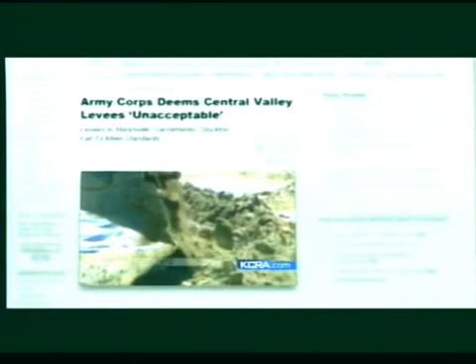An extensive inspection of California's levees is raising questions about the standard of maintenance of levees across our area. There's a concern of under-seepage through sandy materials under the levee. Sacramento is the most at-risk metropolitan area for flooding.

Yeah, it is going, and look at the water just raging, and that is heading towards homes.

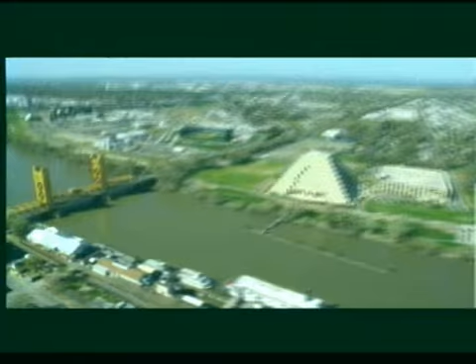Across the nation, man-made mounds of dirt or concrete, commonly called levees, surround waterways, farmland, and cities, helping control the flow of water and reduce the risk of flooding for millions of people. In California's Central Valley, there are as many as 6,500 miles of levees.

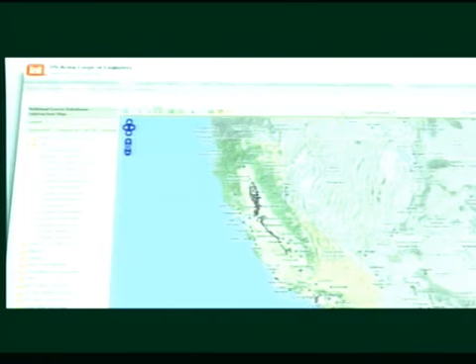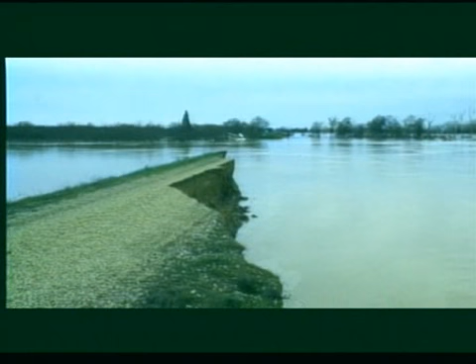Levees are an extremely important part of the region's flood risk reduction system, but like all infrastructure, without continual inspection and maintenance, they are guaranteed to fail. There are four primary reasons why levees fail: seepage, stability, erosion, and height.

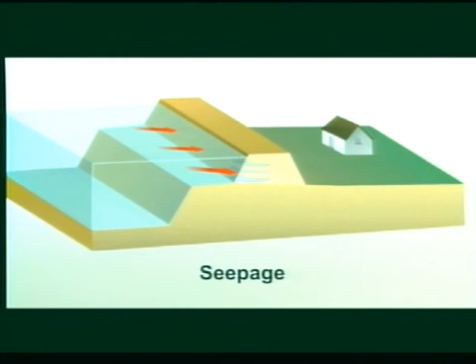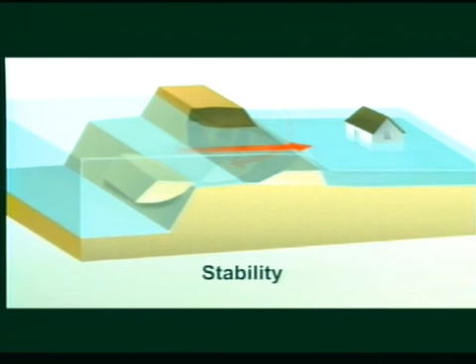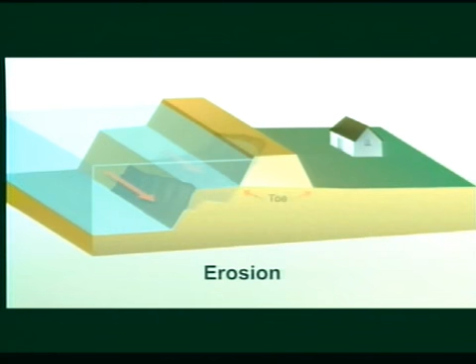A seepage levee failure involves water literally seeping through the levee or the levee foundation. A stability failure involves a section of levee sloughing off because of water up against the levee. There are numerous types of erosion failures, but what's prevalent on the Sacramento River flood control system is toe erosion, steepening the slope such that it's unstable to the point of collapse and inundation.

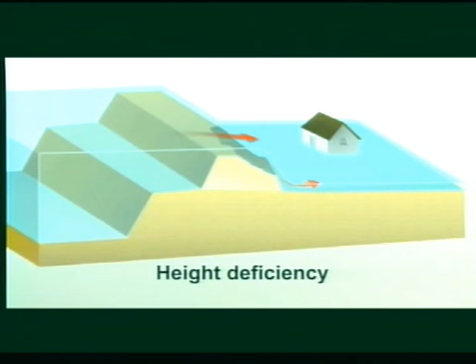And then there's levee height. When you get more flow than what they're designed for, it oftentimes leads to a levee failure because of water spilling over the top of the levee.

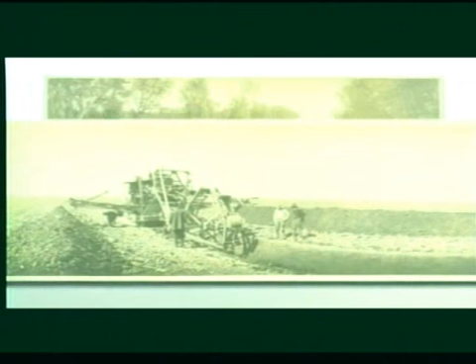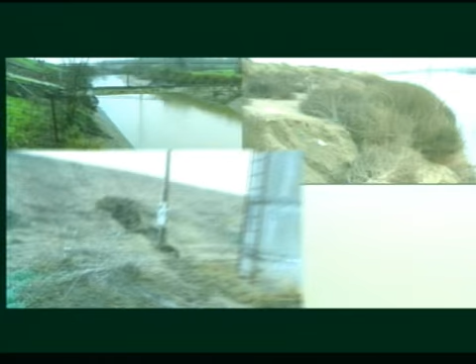Many California levees were constructed more than 100 years ago, often by non-engineers simply piling up dirt along a riverbank or around an area of land to stop floodwaters. Over time, without proper maintenance and improvements, and because of impacts from weather, animals, and unauthorized development, these levees became weaker and weaker. As more and more people move into the floodplains behind those levees, the risk of catastrophic flooding continues to increase.

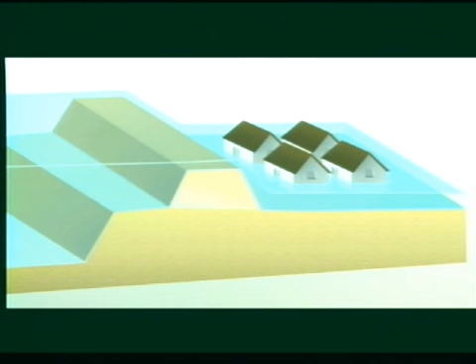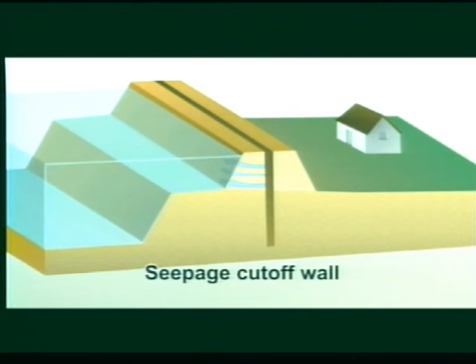So what do we do to fix levees to deal with those various problems? For seepage, a common fix is building a seepage cutoff wall, constructed by digging a deep trench into the middle of the levee and filling the gap with an almost watertight wall of clay or concrete.

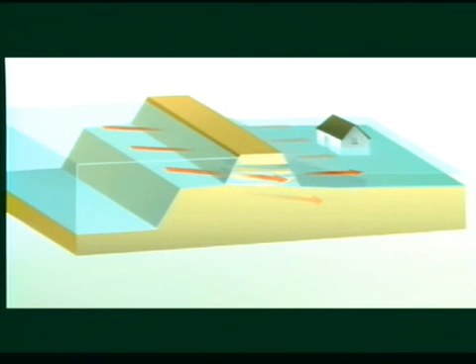Cutoff walls can only be constructed to about 120 feet deep, and if you're not able to tie into an impermeable layer at that depth, then we have to use a different method, and what's frequently used is a seepage berm. The intent is to extend the seepage path long enough so that the velocity of the water coming out is so reduced that it doesn't weaken the levee and levee foundation.

Stability is dealt with by widening a levee and flattening the slopes. Erosion is dealt with by building a layer of rock to strengthen the levee and its foundation. For height deficiencies, we construct levees higher or build a flood wall.

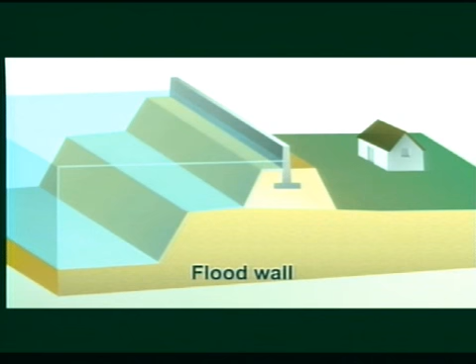Even after levees are improved, there will always be risk. That's why continual inspection and maintenance is required. The U.S. Army Corps of Engineers sets the safety standards for levees under its authority. Local and state agencies own and maintain the levees. To find out more about levee projects in California's Central Valley, visit these federal and state websites.

I found that video quite compelling. It tells the story about what we're doing on our project. And I thought the graphics were very good to help the public and the board and everybody watching understand what we're talking about in a little bit greater detail. We're going to post that video on our website so that others can come and take a look at it in the future.

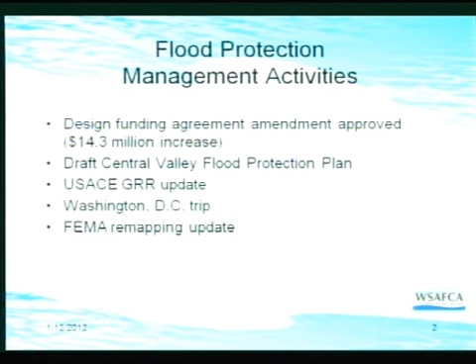Yesterday, we had a very positive meeting with Congresswoman Matsui at her request. She asked us to come in and give her a briefing about our program. Mayor Cabaldon, Bill Panos, Rick Reinhart, and I attended that meeting. It was very positive. She's very well informed about all the aspects we're going through. She's been with SAFCA now, representing them for 8-9 years, so she's very well versed in the language we're talking and all the issues we have to overcome to get projects moved forward through the difficult process of the Army Corps. So she's very well engaged.

She's looking forward to assisting us even before West Sacramento comes into her district, because she understands the time is now on some of these items, most specifically the 104-221 issue. She informed us that she has regular dialogue with the Assistant Secretary of the Army on this issue, and now she's going to be representing West Sacramento. So we were very much encouraged by the conversation we had yesterday. We're going to continue to work closely with her staff and herself, and I think this is going to be a very, very positive thing for the city of West Sacramento and our flood protection program.

So just to quickly highlight some of the construction work we completed in 2011: the CHP Academy and the Rivers EIP projects are completed. We're just putting the bow on everything now. We're going to be working on the construction documentation report that we need to produce for those projects so that at the end of the day we can get those projects certified.

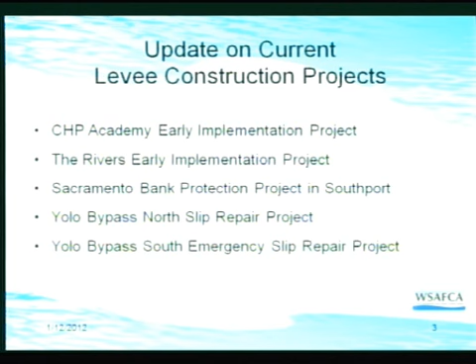Okay, let me stop there and see if there's any questions on what I just talked about, the current projects that we just wrapped up and some of the meetings that we had.

Okay, so I'm going to launch into the Southport EIP project. Today's goal, what we want to present to the board today, is Task Order 3, the findings that we have in Task Order 3, so you can get a real good understanding of those findings, the alternatives that we looked at, the combined measure alternatives, and get into some of the details there.

And then we're going to show the two alternatives that were taken to the 15% design level to give us greater understanding of how we combine certain alternatives and what they actually look like on the ground, so that the board can have an idea of how we start assembling products and what they look like, so that the board can make decisions in the future on that.

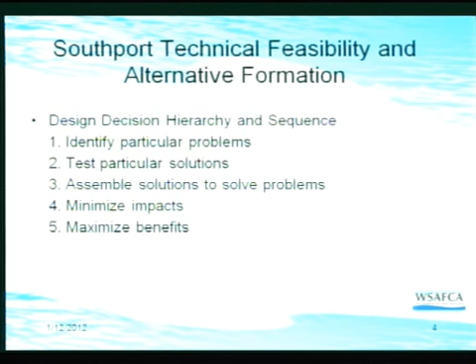So as a reminder, we went through a lot of detail last month on the steps it takes to get through a process such as this project, how you have to analyze, you have to identify what the problems are in your system. You have to identify solutions to correct those problems. You look at all the different alternatives.

Some are determined to be a feasible alternative. Yes, they will correct the problem. Others are determined not to be feasible. They don't correct the problem. We stop analyzing those alternatives.

And then you start testing, you start putting together the different alternatives to build a project, and then you run those through the decision-making process. I wanted to remind everybody on the decision hierarchy and sequence matrix that has been put together, very detailed, gives the reader a good understanding of the steps it takes to run different alternatives through an analysis process so that decisions can be made on how to move forward.

Some of the key items to talk about is feasibility. Does it work? Does it not work? What are the impacts of a feasible alternative on adjacent properties, the environment, the city as a whole? So we have to look at all of that. And then you got to look at what's the cost effectiveness of it.

As I talked about earlier, there's an urgency that we need to move forward and get these improvements in the ground, not just to reduce risk to life and property. There's also other factors. There's the FEMA remapping factor.

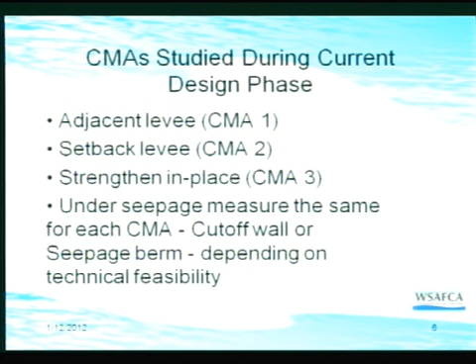If you look at CMA 3, strengthened in place - I should have highlighted more information about the legend, but on the left you basically have a series of line and color codes that allow you to look up and down the alignment and deduce what combination of measures were proposed for a given segment. So, for example, in segment A for CMA 3, you have that dashed green line, slope flattening with a cutoff wall. Even at that time, we had some evidence that a cutoff wall might be feasible in A.

One of the things we wanted to do, in addition to refining the width of seepage berms during the third task order, was to confirm what depths we thought we would have to install a cutoff wall to. That was another important step associated with the third task order.

So I'd like to walk down the alignment, and using these three proposed alternatives or study alternatives, this is the question we really wanted to get at: were the corrective measures that we think are feasible there, are they? And if so, are there important modifications like the width of a berm or the depth of a wall or the possibility of a wall? How good were our assumptions? So the slides that follow report on our findings of technical feasibility on a segment-to-segment basis. The purpose of walking through that exercise is when we get to the end of it, that essentially shows us what the menu of options are from which alternatives can be assembled to take to the 15%.

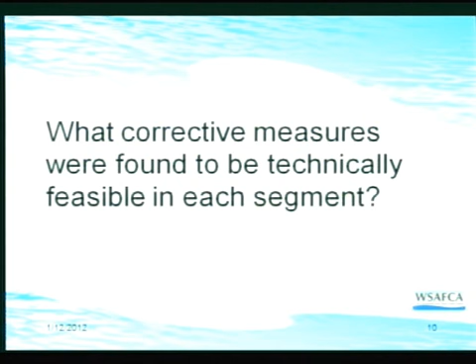So all of these slides are formatted the same, but let me just say a few things about it. For each segment, we have a listing of typical deficiencies that we suspect are there or that are documented to be there. Those are listed in bold on the left. Then in italics, we've listed the typical corrective measures used to correct for those deficiencies. If there's a check next to the corrective measure, that means our evaluation showed that measure would be feasible to put on the ground from an engineering point of view.

Okay, so we've got underseepage, erosion, geometry, and stability. All of those measures listed to correct those deficiencies, with the exception of relief wells, at this level of study, are considered to be technically feasible. A reminder that the answer on whether or not it's technically feasible is heavily dependent on the local subsurface conditions. So if they're the same from one segment to another, you're going to see a slide that says the same things are feasible from one segment to another. If the subsurface conditions vary, the technical feasibility can change.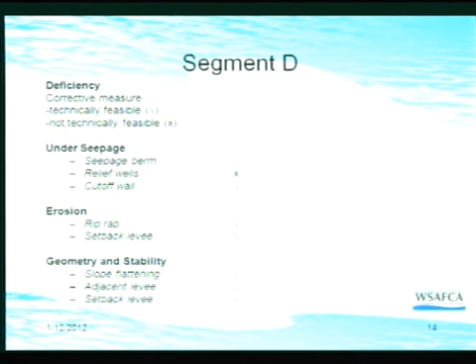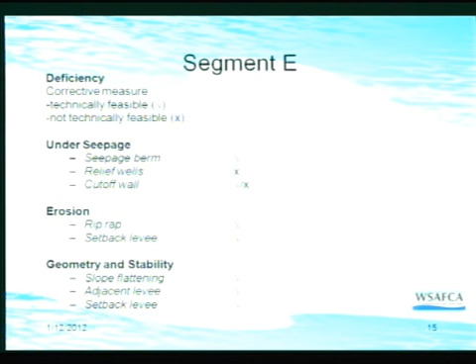Segment E, we have a similar situation as to segment B with regard to underseepage mitigation. Relief wells were determined not to be feasible. A portion of E has a layer within reach to tie a cutoff wall into, and for another portion there's not.

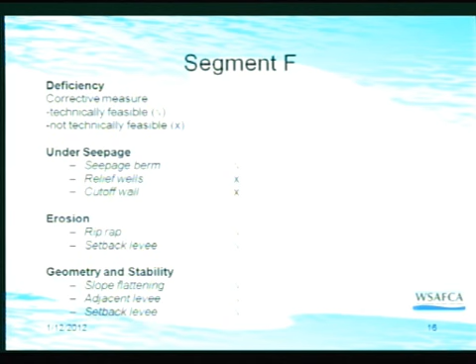Segment F is similar to segment C, so F is north of G. Relief wells are not feasible, cutoff walls are not, a seepage berm is. The other measures listed for erosion, geometry, and stability are feasible.

And segment G, the only measure that we found to be not technically feasible was relief wells.

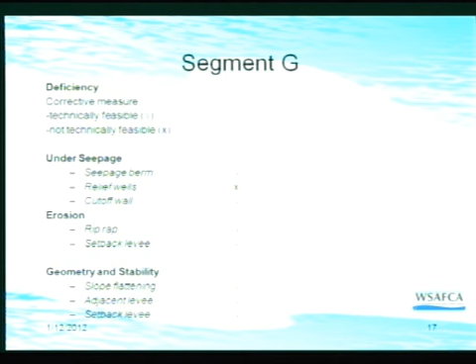So taken together, every place we had a check gave us a menu to sit back and say, now we're going to assemble what we're going to call a proposed alternative and what we're going to call an alternate. It has to include measures that we have a check by. Later you'll see the combination of those measures in service of a proposed preferred alternative and an alternate. This was just to take us through the process. One other important thing we did that plays into the decision-making about what those alternatives look like was to develop

project cost for the three combined measure alternatives that we just went over. What I've listed up here are the different cost components: property acquisition, structure demolition or relocation, utility relocation, environmental mitigation, the levee improvements themselves—these are the seepage berm and the cutoff wall, the adjacent levee, and so on—planning, engineering, and design, and then construction management.

So we've developed draft cost opinions for these three. We've submitted them to our internal team for review. Some questions have been raised about assumptions that fed into those cost opinions, and we're currently revisiting those assumptions. One area we're looking at very closely is how we're estimating the required cost for controlling erosion. Unlike underseepage and some of the other deficiencies, the criteria for controlling erosion can vary, and the associated cost can too. So we're looking through different options for developing a basis of design for controlling erosion and trying to assign the correct cost. When that process is completed, we'll be presenting that information to the board related to these three CMAs.

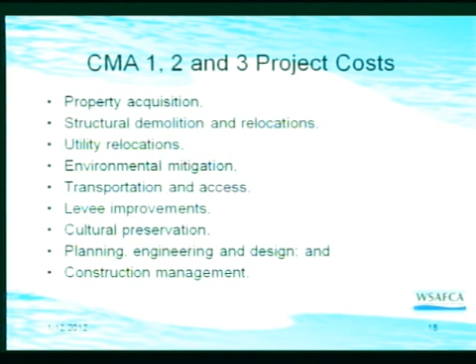So Michael just presented the CMA analysis. If you could go to the next slide, please. We were hoping to present those cost opinions for those 3 CMAs, but as Michael identified, they're under the review process. Our staff is burning the midnight oil reviewing those. We've come up with some questions, most specifically related to erosion and how we mitigate for it, the amount of riprap we're going to need to place on the existing levee, and at what locations. Because those costs can really skew the cost for that type of alternative, we had to hold back. We didn't want to put those cost estimates out today, knowing they're going to potentially drastically change in the future, and we're hoping they change for the better.

We're hoping to pull back those costs. We're hoping to minimize the amount of riprap that was anticipated at this juncture in the process. So those costs will be coming to you next month.

What we wanted to highlight today is based on costs, that's how we're going to start factoring in when we negotiate with DWR, what type of project are we going to move forward with, and how does it figure into their guidelines of cost sharing. We've identified CMAs 1 and 3, the adjacent and the fix in place, will have a certain range of cost share percentage, and CMA 2, a setback levee, has a higher cost share percentage, and we have certain ranges identified now. Once we start cobbling together these CMAs to actually define a project, and you'll see what we've done to a 15% level that Michael's going to present today, once you start assembling the different components and making a project out of it, these cost share percentages will get better identified, and most likely they're going to fall within these ranges.

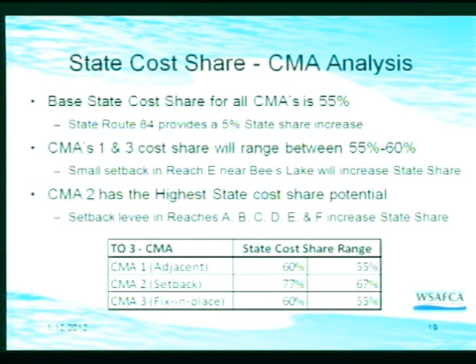He's been doing a wonderful job with DWR and has established a very good relationship working with them within their guidelines. So it's been a great process.

So how do we continue to move forward? What are the steps that we take? Earlier in the presentation, I identified the decision-making matrix. That is what we continuously go back to. It's like the gauntlet. We run each of the alternatives through that gauntlet to determine the best methods to move forward.

With the goals as indicated on the slide, we need to construct as much flood protection as possible. We need to maximize this project, and if we can, build the entire 6 miles. That's our goal. Goal 2 is to minimize to the extent feasible the impacts on adjacent properties and the community as a whole. It's a delicate balancing act, and we're going to continue to refine the way we do business and present information to this board so we can collectively make the best decisions for the entire community.

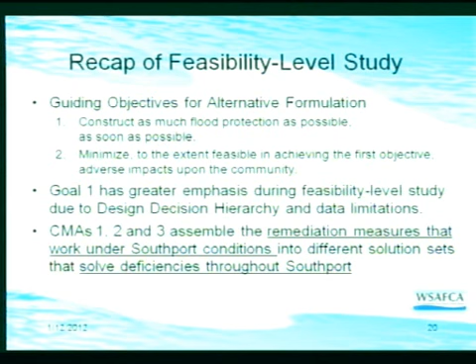So that's the process we're running through. Where we're at right now, HDR has done a wonderful job of looking at all the remediation measures and determining whether they're feasible or not with the level of information we currently have. We're going to continue to get more information, and I'm going to walk you through that process.

So CMAs 1, 2, and 3, what Michael presented, those are the outer range of feasible options. An adjacent levee, we took that through the entire 6 miles - what does that look like? A setback levee, the same thing, the entire 6 miles, what does it look like? And a fix in place, so we can understand what's feasible and what's not with all the measures that you add onto that type of improvement.

Now we're going to start moving into a greater level of detail as we move from 15% ultimately through 100%, with the goal to work closely with the community to minimize impacts and build as much of the project as we can. Those are the overarching goals. We're going to continuously look at how we're planning to move forward and run those potential projects through that decision-making process.

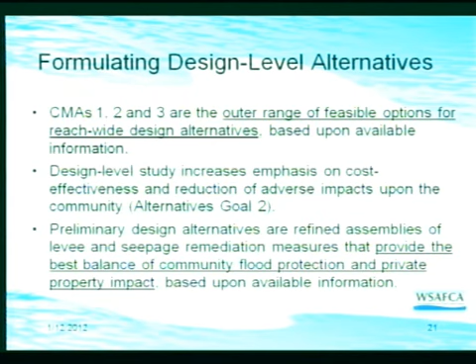So Michael's going to get up and present how we as staff have compiled the CMAs. We've pulled together the best possible methods within the different reaches, and we've produced 2 alternatives that we needed to take to a 15% level so we could start laying footprints on the ground and identifying potential impacts of what those projects would have on the community. Michael's going to walk through those with the board.

How we went about this is, from a staff level, we assembled the best components for the various reaches. We sat down with our steering committee, Ken, Bill Panos, and Toby Ross, our city manager. We looked at what's feasible and what's not within certain reaches, and started putting together components and creating projects. So one alternative, we didn't put 'staff' but it's the preferred alternative - based on today's level of detail, it minimizes the footprint and minimizes impacts to adjacent properties. The other alternative is a longer setback levee.

It's, I think, half a mile or more of setback levee versus the preferred alternative, so we get an understanding of what that looks like. And now we're going to start pinning down costs so we can understand the cost of 1 versus 2, and the cost share with the state for 1 versus 2. So we're getting much more detail as we move forward, so the board and community can understand the magnitude of the cost, the magnitude of the impacts, the magnitude of the cost share with the state, and how we want to move forward.

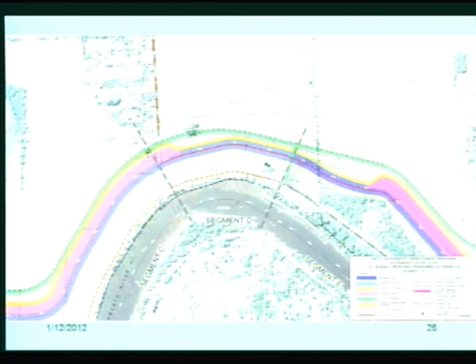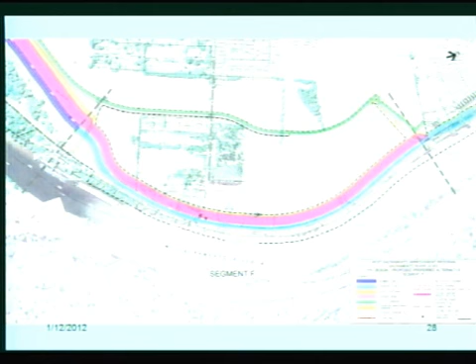Go to segment F. Segment F is an adjacent levee with a seepage berm, about 120 feet wide here. It's a good example of where our further evaluations showed that a 400-foot berm was too much, and that we could demonstrate with our seepage models that one of about 120 feet of width was adequate. Those are the sorts of refinements that fall into the category of minimizing impacts to adjacent landowners. As originally drawn, this berm would have been 280 feet wider, and that's because we didn't have any better information to exclude such a great width. Now we do. We're able to pull that berm back.

Segment G at the far north end of the project. At the very north end of F, we pick up what we call the finish layer, and so you'll see a cutoff wall pick up there, and then it runs all the way to the north end of segment G. So we have an adjacent levee with a cutoff wall.

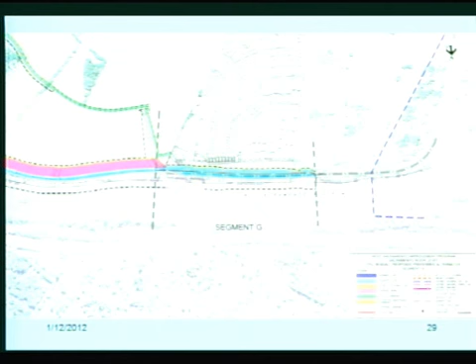I think what I'd like to do is walk through the alternate. It's very similar. I'll highlight the differences, and then I can entertain questions after that. So the second handout is titled Proposed Alternate Alternative. The overall project length is about the same. The center line varies a little bit, so there's about a 1/10 of a mile difference.

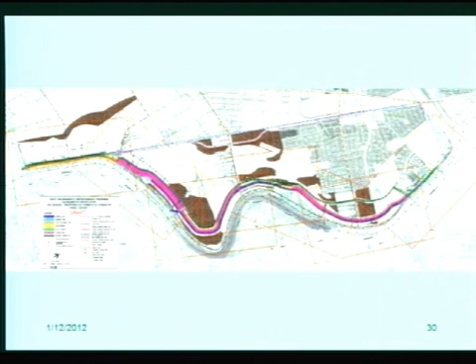The main difference between the proposed preferred alternative and this alternate is that we've added in about an additional 1/2 mile of setback area. We'll see in more detail where that occurs. So the first alternative, or the proposed preferred, has 2.8 miles of setback. This one has about 3.3. Segment A for the alternate is identical to the preferred alternative.

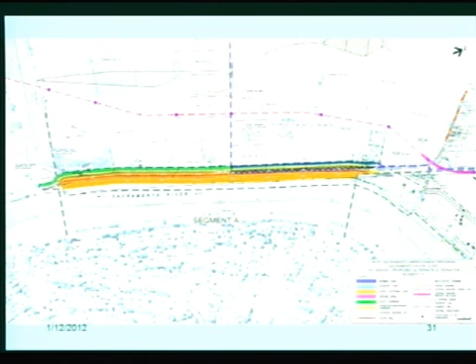Segment B is where the main change occurs. The transition you see there from the powder blue to the purple is the transition from the adjacent levee with the berm to the setback levee with the berm. We basically pulled that transition further to the south, so this is the area in segment B where there's additional setback built into the alternative.

It's worth comparing and laying those two segment Bs side by side, and it becomes abundantly clear that installation of the seepage berm in service of correcting the under seepage is what's having a significant impact on adjacent landowners.

Yes sir, that diagonal setback at the... actually, Tom, that's a very good question. Tom's question is about, if you look at the far right-hand side, you'll see the purple hatch coming down at a diagonal angle down to where the existing levee is.

Because of the size of this job, Tom, and the amount of material we'd have to get into place in one construction season, when we developed the cost opinions and emissions analyses, we assumed any alternative would be installed in two different phases. For our design exercises, we assumed segments C through G would be installed first, and A and B would be installed second. So what you see there is the southern boundary of phase 1, because we'd have to tie a setback levee back into the existing levee, and we've just left it on here.

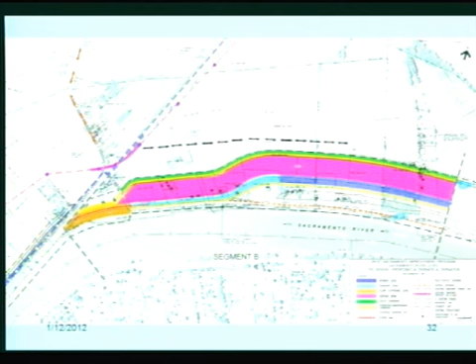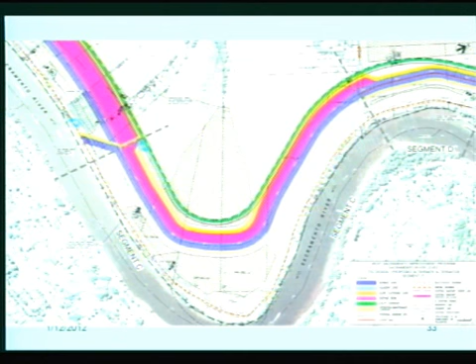If you look at segment C, it's the same as the proposed preferred alternative, a setback throughout with the seepage berm. Segments D and E are the same.

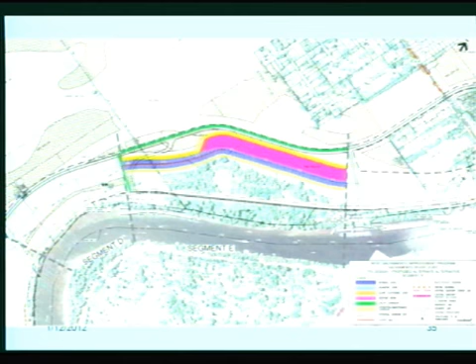When you get to segment F, I mentioned one spot where I think I mistakenly said all of the setback was increased in B. In the proposed preferred alternative, we had an adjacent levee with the seepage berm in F. In this alternate, we've shown the levee set back throughout all of F. Segment G is the same as the preferred.

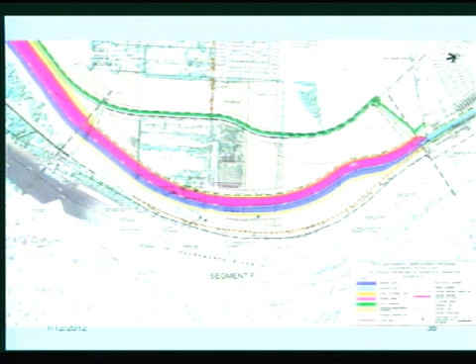So I can provide more detail about either of these alternatives or answer any other questions you might have, or I might have to ask some others to support with answers.

On segment B, on the second handout you have, is that basically the preferred alternate? Sorry Bill, could you repeat your question on segment B for the preferred alternative? Yeah, on the second handout, the lighter colored one with pink. It appears that the first handout has almost twice as much land involved as the second one. You mean total real estate purchase associated? Yeah, there would be more real estate purchase associated with the alternate than the preferred alternative. That's true.

Yeah, the preferred—sorry Michael—the preferred, right, at this stage in where we are today, is we're trying to minimize the impacts on adjacent property. So the preferred shows more adjacent levee versus setback levee.

Now, what I was going to highlight in a couple slides from here, but I might as well do it now: what these 15% designs don't show is the further refinement we're going to take as we move forward to start combining, for example in segment B, a shallow wall or what they call a hanging wall. We can't get it all the way down into a clay layer, but we can get it down far enough where maybe, in combination with a seepage berm, we can minimize the footprint onto the adjacent property.

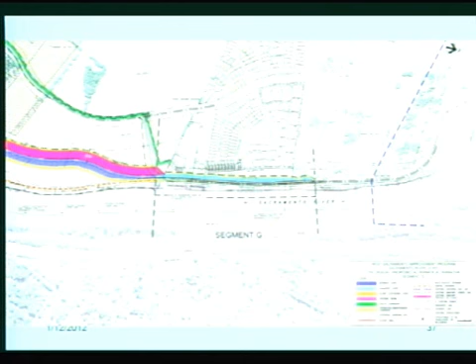Okay, so this is where we're at to date. We combined the CMAs into 15% designs, two different alternatives. We're at a level of detail that our staff can continue on in the design process to further refine impacts, and also to get the magnitude of cost of one alternative versus another, how those factor into the state's guidelines of cost sharing so that we can determine how much project we can build. It's a step-by-step process as we move forward.

Next month, like I said, we'll have those costs presented to the board. We'll lay that out in much greater detail so the board can understand: if we choose this alternative, these are the relative costs the project will have on the local agency and on the state, and here are the steps we take to minimize impacts as we move forward.

What we've made a commitment to do, as this board has directed us to do, is work very closely with all the property owners to educate them on the process and to work with them on trying to minimize the impacts. The Segment B property owners have a geotechnical engineer engaged, and we're going to bring him into our process so he understands what we're doing. The Liberty Development Group has a geotechnical engineer; we met with them yesterday and will continue to meet with them to further define and refine the projects on their property, and so on as we move up the alignment, because we're working with everybody who's impacted on this project and who wants to be more educated on it.

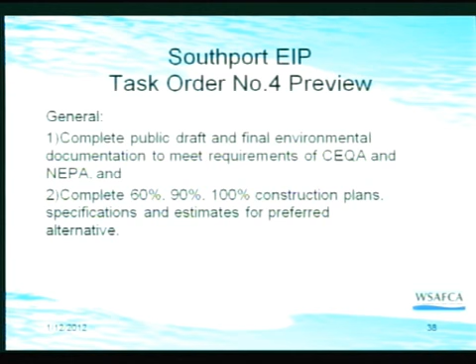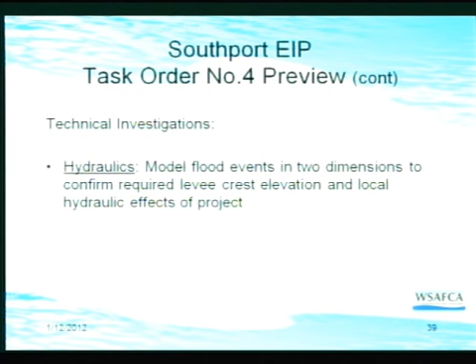Other components of task order 4 — I'll quickly run through these — include continuous hydraulics analysis. Geotechnical work is also very critical in determining the footprints of the projects.

We're going to start, like I mentioned earlier, combining different measures to see if in combination they minimize the footprint while still achieving our goal of completing the project. We have to keep in mind what the goal is: build as much as we can, and minimize impact as the second goal. So we need to continuously evaluate both of those goals.

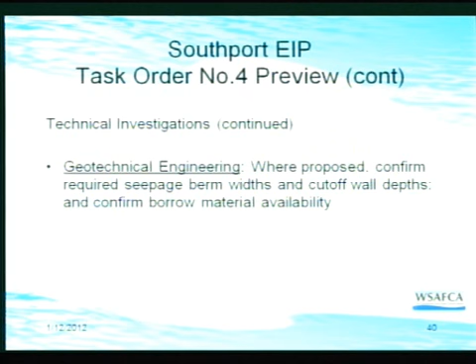Geomorphology — we have a lot of technical experts who've done a lot of work to date. They need to continue refining their work in order to minimize impacts, identify costs, and at the end of the day build a project that we can certify.

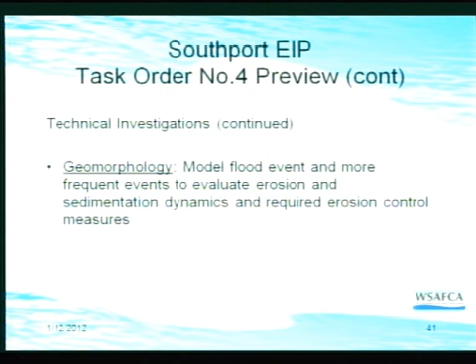Groundwater evaluation. Civil design — this is combining everything together, pulling it all together.

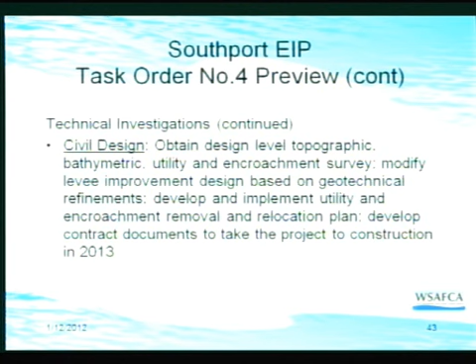Now that we've gotten to a 15% level, this is another important point: we as staff can start working with all the affected utility companies, since there are a lot of utility relocations that need to take place. We're going to start launching into a greater level of detail on surveying that needs to take place. These are the types of components as we move forward — we need to start incorporating them now that we have a better level of detail, and we'll continue to move this process forward.

So here's our milestones. I want to continuously remind the board and the public of what our milestones are as we move forward. On the 26th of this month, we're going to present this same detailed information to the public in a better format for them to ask questions, talk about their properties, pull aside the technical experts and ask their questions.

Next month at this board meeting, we're hoping to present the TO3 cost opinions. We weren't able to do that today, but we'll be able to next month. We need to present this board with enough information so it's comfortable giving us direction on how to move forward. We're going to work very hard to get all our cost opinions together and how they impact one design feature versus another, so the board can make a decision on how best to move forward.

And then we're going to bring task order 4 for approval to the board next month. What we're hoping is we at least get task order 4 approved so we can continue with a lot of the work we're doing right now. If the board isn't ready to make a selection on a preferred alternative, we can push that to the next board meeting if as staff we haven't given you enough information to make that decision. But we're going to work very hard to prep the board and be comfortable giving direction to move forward. That's the goal for next month.

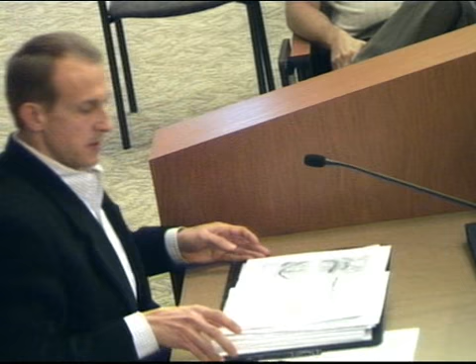Well, one thing was brought up was the Liberty. You mentioned the Liberty people. Liberty Development, yes. When did they enter into this discussion?

They own the property around the Bees Lakes area, and this project being a setback levee at Bees Lakes has an impact to that proposed development. This is the first I've heard of it. That's the reason I was asking the question.

Well, we've actually been working for a long time with their engineers, and it's been a long time since I've updated the board on this, and I can understand why you've forgotten. But their engineer had produced some geotechnical borings and analysis that we've incorporated into our process, and we've taken it further from where they ended, and we've continued on. And we're going to loop back in with their geotechnical engineers to start sharing our current findings and move forward with them.

Pardon? They changed their name. He just told me what it was. You have any questions? No. Tom? I have a couple.

Mike, or maybe the other Mike, on segment B in the preferred alternative, you do show a stretch of cutoff wall in the southern portion there. Are we saying that north of that, that cutoff alternative by itself is not feasible?